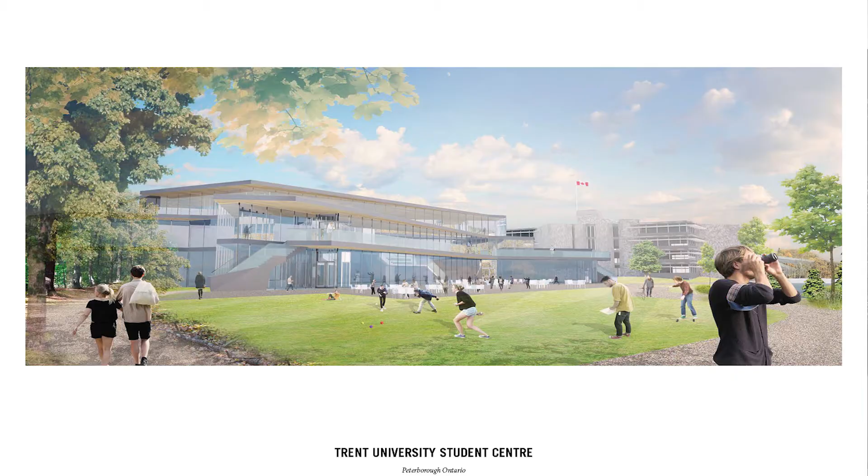This was a project I worked on for a year between my undergrad and my master's: the Trent University Student Centre. It was a really great project to work on because students are an incredibly diverse user group. They're really passionate about what they're doing, they all want to be there, they're very politically engaged, and they're super active in a wide range of things. So this was a great building because it was full of all these different kinds of people and programs. Working on it made me realize that I really wanted to be an architect and that I wanted to go back and do my master's.

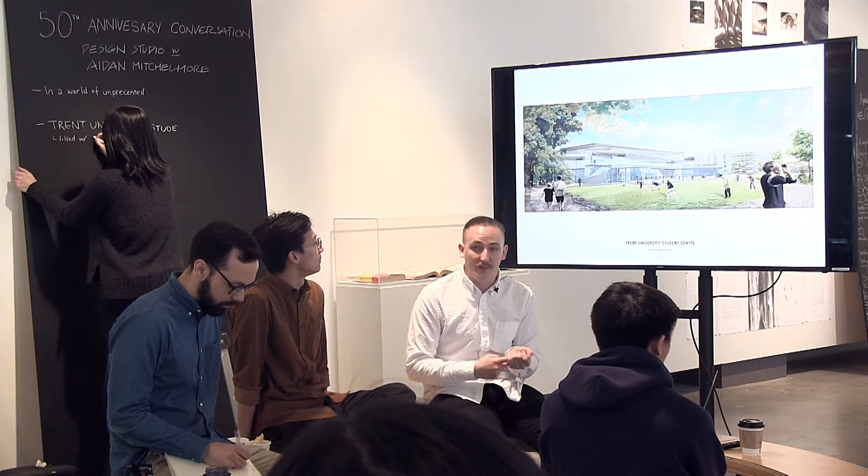Going into master's, I knew I wanted to work on some kind of physical building for my thesis, and that I wanted it to be a cultural building within an urban center. So knowing all of those things, I arrived and started to search for this idea of what's invisible or what can go unnoticed within the built realm, and how architecture could find a way to explore what we take for granted or what's unseen.

So I discovered, or arrived at, this site of Union Station, which is at the heart of downtown, an incredibly dense and ever-densifying urban center. That became the site, and then I went through a process of uncovering it.

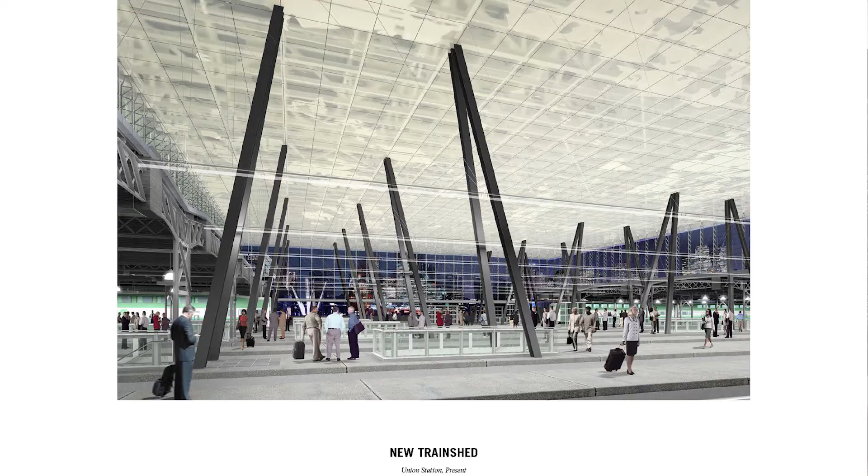But this is the kind of station that is proposed and will soon be completed: a new train shed above the station, and about 200,000 square feet of private leased space constructed below the entire station. Essentially they're building a giant high-end shopping mall below the station, and giving the lease over to one specific entity. That lease also allows for the private leasing of all the public spaces within the station. This is what I started to uncover after visiting the station, seeing it under construction, and wondering what the future is going to be like.

So it's a bit worrying, this kind of future that's going to happen.

So this is the departing point for my thesis: how can I imagine a proposal that transforms the station away from a capitalist, overrun, commercialized space towards a more democratic and public space.

So for me, how many of you are in master's thesis right now? Can I just get a show of hands? Okay, so the rest of you are in undergrad?

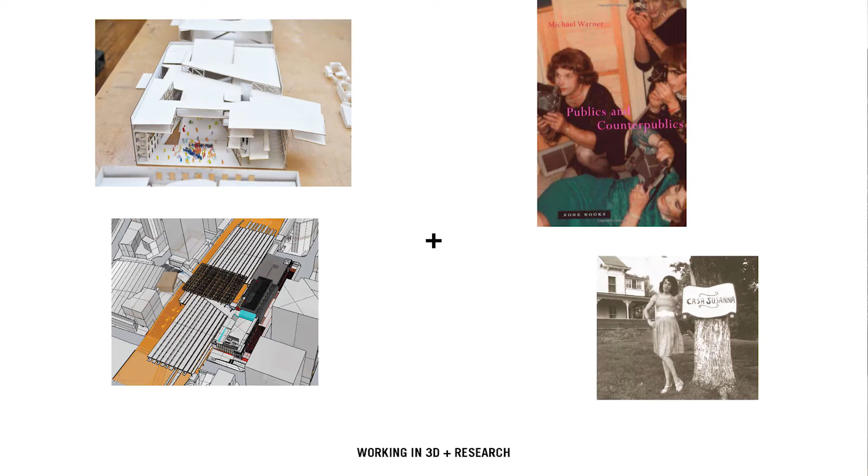As this process happened, I was also refining that design problem. What's interesting about thesis at Waterloo is that you can take your design problem and shape it while you're shaping the project, so that at the end they hopefully meet in roughly the same place.

So when I say working in 3D, these are some sketch models I did. As I worked through digitally, at certain points I would just hit print and laser cut a physical model.

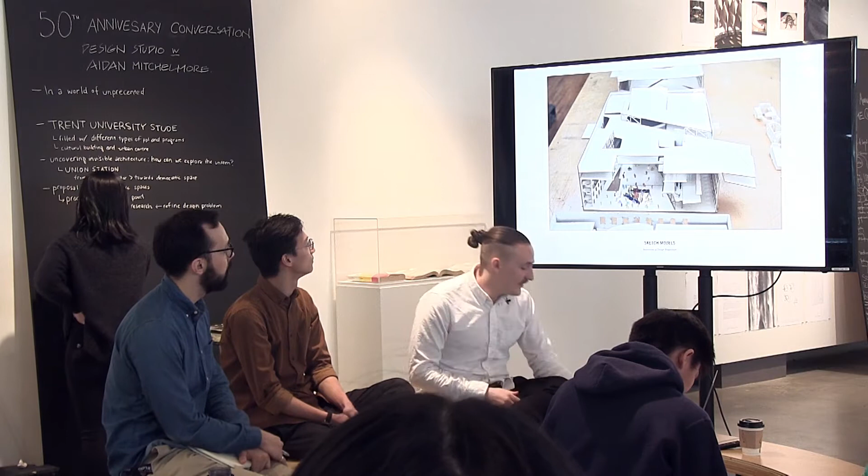Another key part of working in 3D is looking at your precedents. In undergrad, a prof would say look at this precedent, I'd Google it and think 'okay cool' and get back to work. But in thesis, you actually have time to really get to know your precedents, looking at plenty of drawings, models, and photographs to build a 3D model in your head of these precedents. That was a really valuable exercise I didn't get in undergrad—really just spending two days diving in.

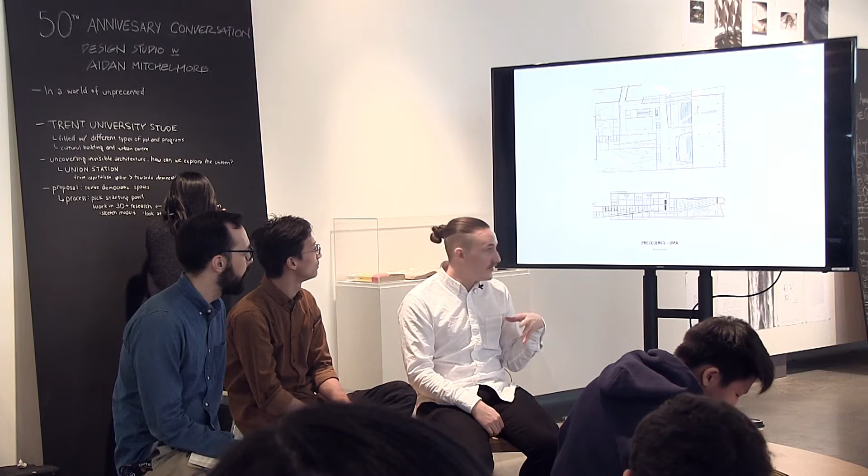For me, the precedents that were really pivotal in my design work were those of OMA, because their buildings are really big, often in urban settings, and have a lot of interesting questions in how they relate to inside and outside. There's also a lot of writing about them, so for me they were really useful.

Another approach was re-examining those models. I bought an endoscopic camera on Amazon, which is not for people use as I read on the label, but it's this camera on a string that you can stick into models and take photographs.

So I took some photographs of some of the sketch models as another way to reanalyze what I've done, and to reinterpret the work and see it from another perspective.

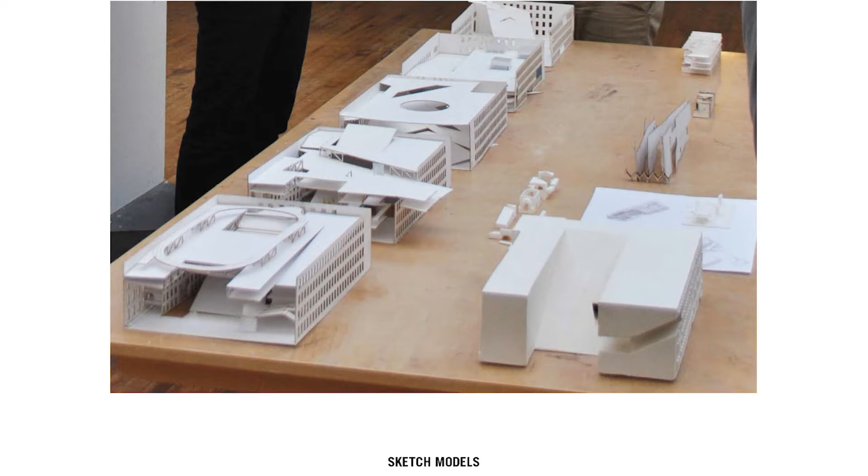So by the end, this is a photograph, a cropped photo at my thesis defense. If you work iteratively and keep making physical models every time you have an idea, what's valuable is you end up with this collection of artifacts.

That can clearly explain your thinking process throughout the design process. You can see on the far side of the image is where I started, which was this vague idea of having a roof plane come through the building. As it went through multiple iterations, it arrived at a more finalized and resolved view. Over here are some other study models, but together you can really get a sense of what the intentions were and what some ways you explored were. So it's great to save those things.

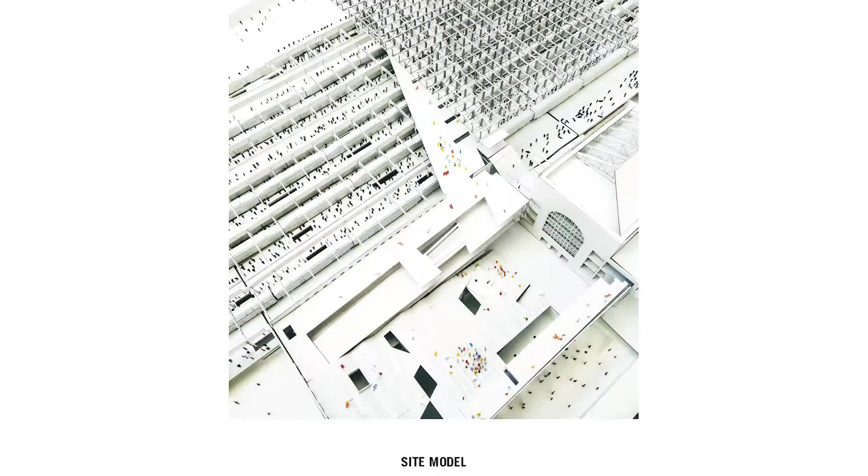And then this is a photograph of the finished model that I had at the defense. So those sketch models were used in tandem with this larger site model, taking the smaller ones and putting them on. This was kind of an ongoing design project in itself. It took like 1.5 years just to build the model that's over there.

So I would take a week off and draw trains and put trains together while I was thinking, or in off time, kind of like a labor of love, that thing. But that's where that ended up.

And then so whilst all of that 3D work and thinking through space was happening, I was also trying to research, trying to blend the two of them together.

And so this book, Publics and Counter-Publics, was really pivotal in trying to understand how to repoliticize this space, and how you could attack Union Station programmatically.

So the rough premise was that since it's become a commercialized space and it's only attracting a very narrow group of the population with its high-end retail amenity, it's only really going to attract shoppers who can afford to shop there. So part of the proposal became: how can this project attract a diversity of publics?

So, what are some other people that could be brought there to rejig and shift what the public of the station was, and turn it into a more diverse and thus democratic kind of space?

So Publics and Counter-Publics is a book by Michael Warner, who's a queer theorist, and he introduces this term of the counter-public, which is a name for a public that exists outside of the regular public.

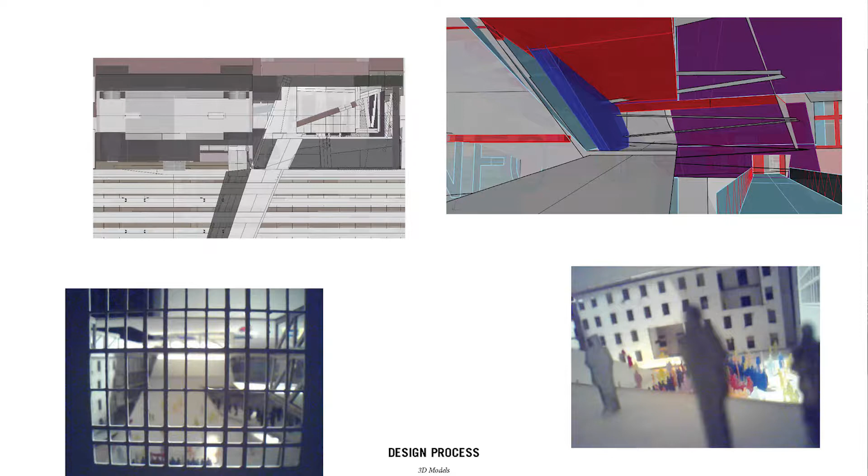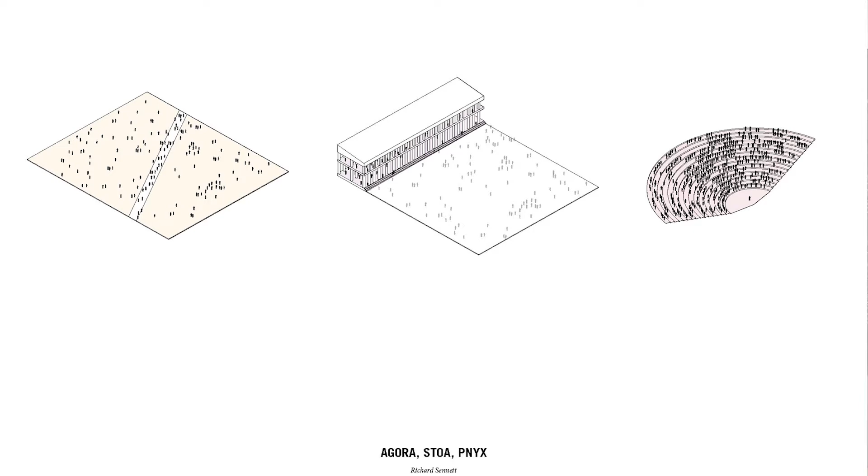So I read a lot about political spaces, and one of the key readings I looked at was Richard Sennett's The Spaces of Democracy. In this reading, which was a lecture, he talks about two main political typologies in ancient Athens. The first is the Agora, this kind of huge uniform public plain — it's the typology that's been adapted for civic squares. Nathan Phillips Square is a great example of this: a big flat plain where you can look out and participate in all these different democratic activities, and choose whether to engage or just spectate.

The other one is the Pnyx, which is an assembly hall created by subverting the ground plane at an angle so a group can focus their attention on one specific member. So while the Agora is this open, egalitarian space, the Pnyx allows for focused and productive discussion. They both have different advantages and disadvantages.

The one he mentions, but that I used as a primary typology, is the Stoa, which is a space along the side of the agora where you can sit back and look out over this big plain and choose to participate in it visually, but also retain your privacy and maintain a level of protection. Historically, these spaces had smaller meeting rooms off of them that you could hide away in. So these three typologies became the basis for the organization of the project.

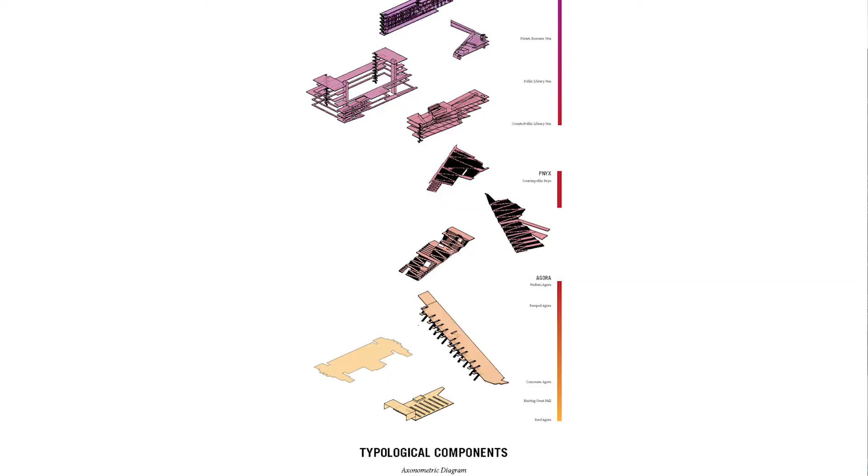I broke these programs up into 9 variations of these types, and they all overlap and overlay — some are more in between this spectrum of Stoa, Pnyx, and Agora. Together they formed this nugget of really intense overlaid social programs that nestles and is interconnected into the existing station.

Looking at the fundamental proposal of how to approach this, one big move — or one main criticism of the existing revitalization of Union Station — is that it took a lot of pedestrian traffic away from the Great Hall, which is the main space of the building.

And it deliberately diverted them downstairs into the basement so they would go by all the shopping malls and buy things. So a lot of architects in Toronto thought this was a huge insult to the station because it's really undermining this Great Hall's public ability to perform as a public space.

So the departure point for the form of the building was to integrate into the path network and propose a shortcut that extends over the station from the south and directly deposits you in the center of the Great Hall. So it's bringing a lot of pedestrian traffic back to the Great Hall as a way to republicize it, but also providing a shortcut to the TTC station.

So that's what you're seeing up at the north. There's about 20,000 people who cross through Union Station, not to use the GO trains that are there, but just to go through the station to reach the TTC. So this would be a bridge over for them primarily, and also a circulation spine that the rest of the project could hang off of.

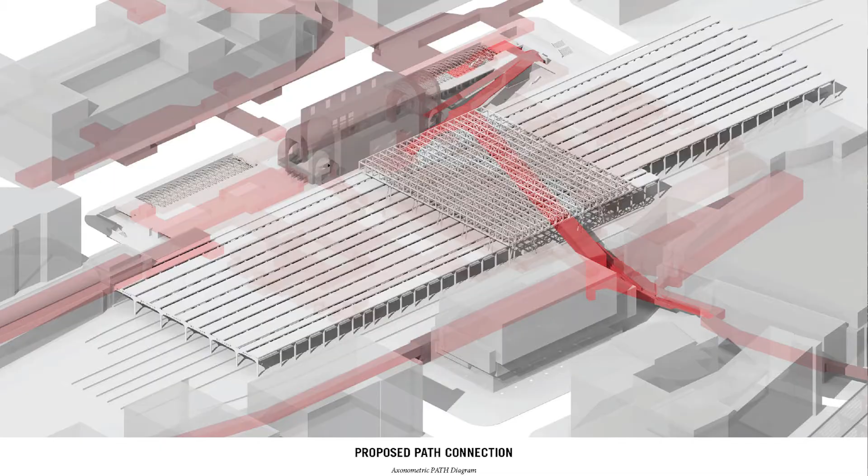So this is another diagram of what it would look like, closer to what you're seeing there. And then the rest of the project hangs off of this spine. I'll quickly go through these 9 types, starting with the agora spaces.

This is a large assembly hall that would be most of the east wing. It's left really open. It's this ramped agora, in between a pnyx and an agora because it's sloped, but you could imagine it as a place that has all kinds of activities taking place on it, and it's a really democratic, free public space that you could just hang out in.

It's connected to a roof, which is again another kind of civic square on the rooftop that you could imagine all kinds of uses for. It connects to a concourse agora that also spans across the train shed of the station. So these spaces take advantage of the low-rise reprieve caused by the railway corridor as a way to put a nice public park space on top of the building.

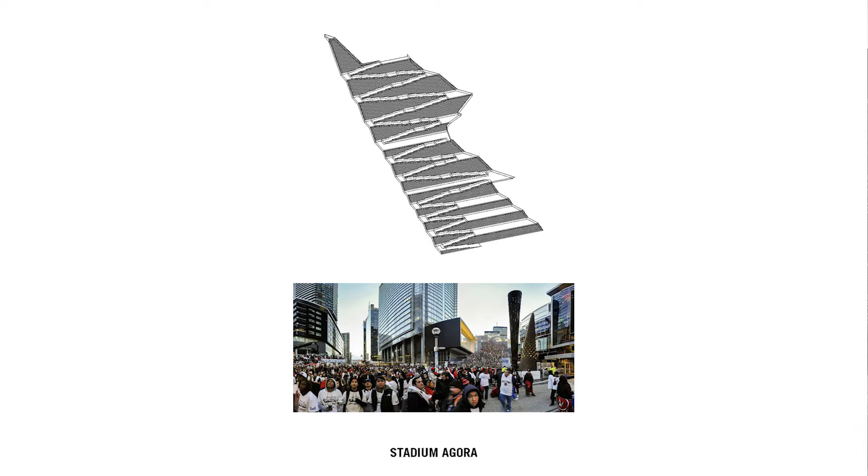And then on the south, it would reach this stadium agora, which is conceptually meant to be an extension of the stadium seating at the ACC adjacent to it. It would be able to become this giant urban spectacle during events at the Raptors thing, like the Jurassic Park. So it'd be this kind of urban performance space, but also like a Spanish Steps — just a place to hang out.

So there's this civic generosity in the agora spaces that suggests a more democratic participation. And then the next one would be the stoas, and they exist along the perimeters, between the exterior heritage facades and the interior agora spaces — they occupy the space in between, able to look into the larger public spaces.

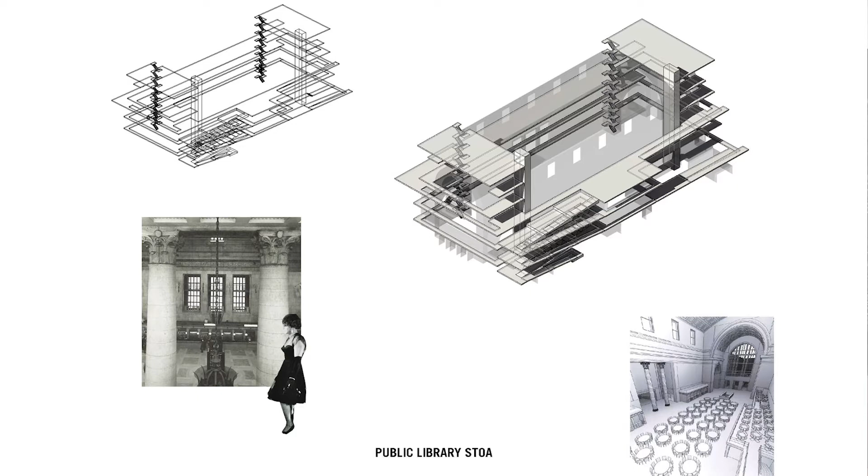This is like a public library that was seen as a way to circle around the Great Hall, as a way — so this could be the future of Union Station as a rental space where you could have a party in there if you can afford it. And so the public library that circulates it is meant to undermine that privately operated event.

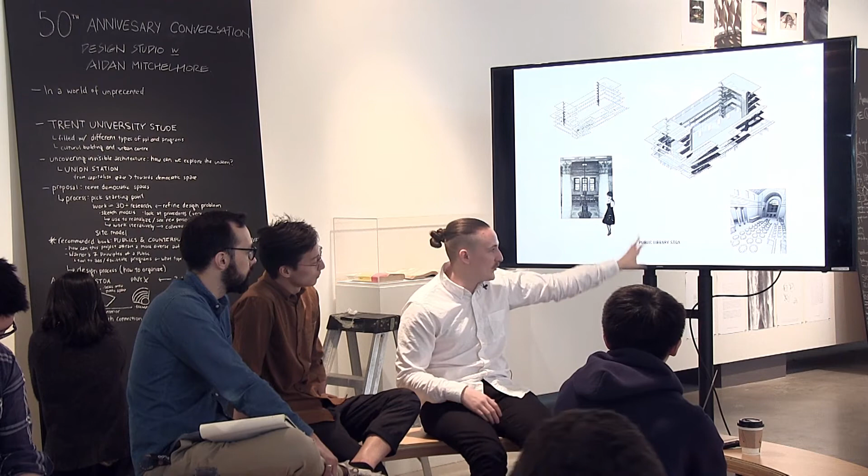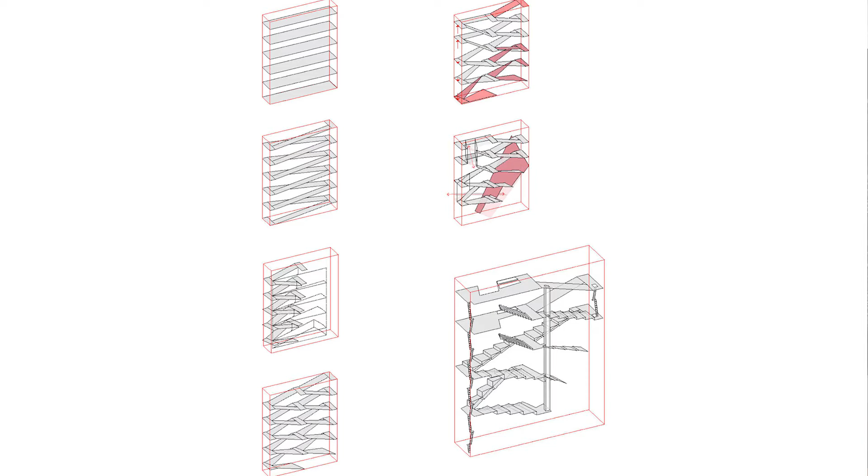And it connects to this counter-public library stoa, which is seen as a library but targeted for counter-public needs, relating to media, like circulation — maybe they make protest posters in there — leaving these programs open so that the publics, which are self-organized, can decide what happens within their spaces. And so this was, the form was derived through a series of manipulations that ends up being this combination of agora, stoa, and Pnyx in this exploded, stretched vertically form.

And then underneath that is this resource stoa, which is a more private space where you could have really intimate meetings. You could have purely anonymous exchanges there. It has its own entrance.

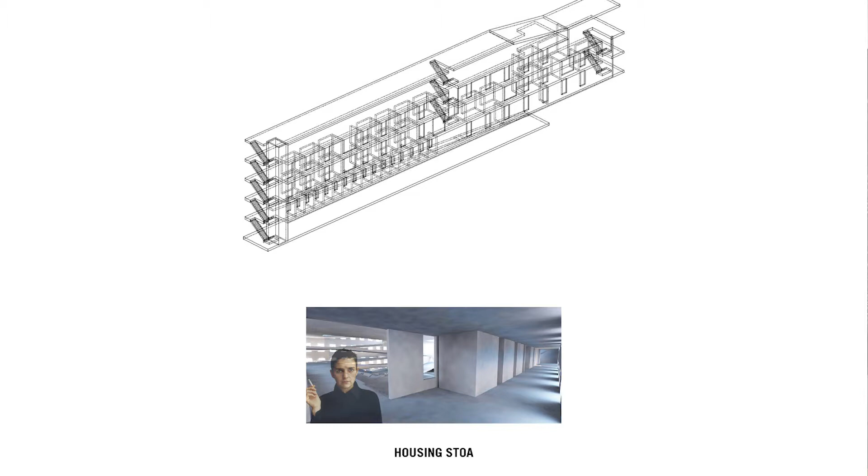Across from that is this housing stoa, which is kind of inserting a home into the station. So if you're homeless or in search of a home, you could hang out on the ground floor overnight, or if you're looking for something more permanent, you could move up the floors of the building towards more stable, more established, more intervention-level home, accommodating a diversity of counter-publics in the building.

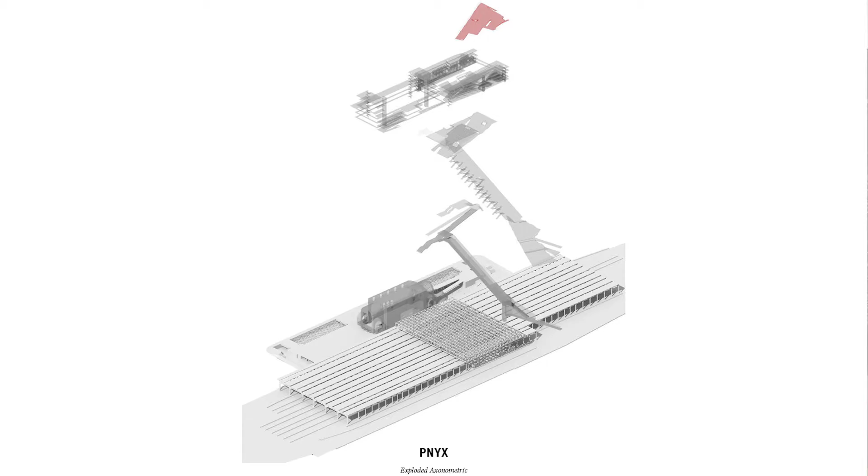The last one is the Pnyx, which slices through underneath the ramped agora, and it's this assembly space that again provides a diversity of participation. You can choose to be very publicly visible, or remain in the shadows, giving these counter-public groups a space to assemble while maintaining some privacy if desired. That was the intention.

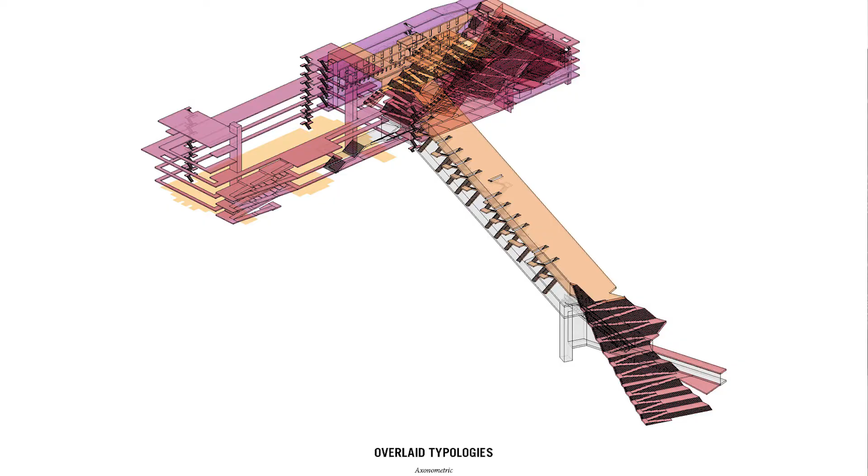So together you can imagine this overlapping, overlaid levels of publicity, counter-publicity, proximity and adjacency, and visual relationships that overall accommodate a diversity of needs.

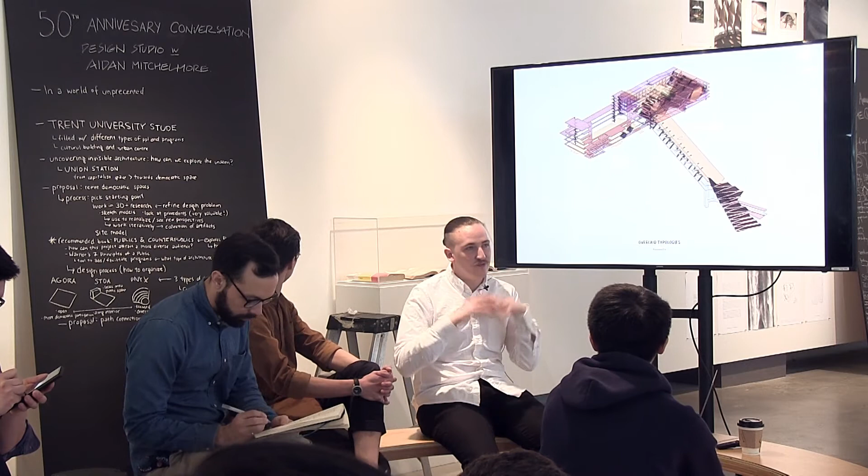All of this is taking place interwoven into the excitement and busyness of Union Station, as 250,000 people use the station a day. So you can imagine it being this really hyperactive, interconnected social fabric.

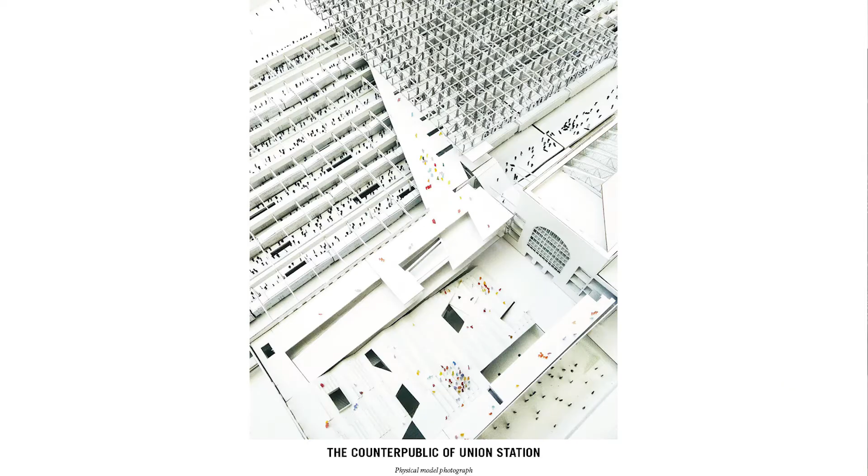Okay, so I'm getting close to the end. This is just a few photographs of the model, taken at my defense, and it was a great tool to explain this really complicated spatial project at a defense where it's a discussion. That's kind of where my thesis ended.

And then I went back to work for Teeple Architects in October, 5 days after defending, which I don't recommend that you do. Take a break.

I went back to Trent, and the student center that I worked on was finished, which was a really cool experience to see. But what was the coolest thing is this building has a gender-neutral bathroom, and actually all of the bathrooms in this building are gender-neutral.

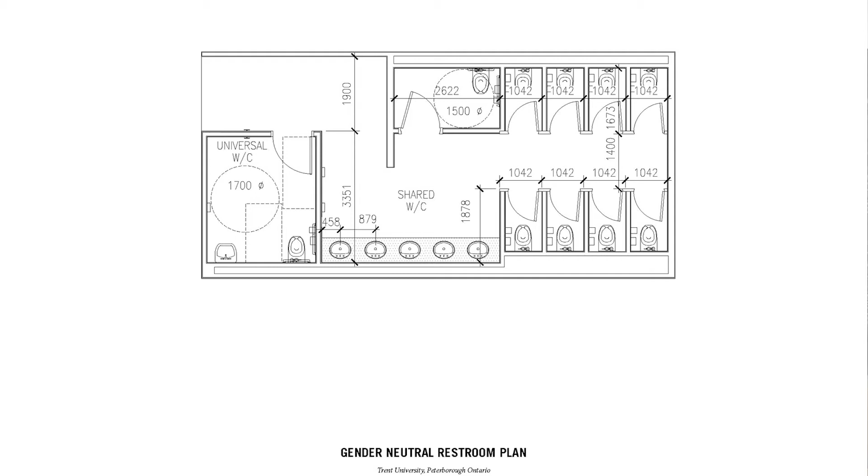That's something the students really fought for, and we as the architects said, look, this is the students, this is their building, let's prove to the university that it can work. So that was kind of our role, to really advocate for what the students want, because they're a very progressive, very queer-friendly institution, and then they ended up building them.

So all of the bathrooms in this building are gender neutral, which is kind of amazing, and it's an interesting way to look at it - in my career I might not be able to imagine the kind of projects we can in thesis, but something as insignificant or invisible as a bathroom can have a huge implication for a counter-public. So understanding the client and understanding the small and subtle things architecture can do can actually be really important.

So I'll leave it there, and thanks.

So we are going to open up to a little conversation right now. Why don't I start with a little question regarding your presentation, Greg. Can you go back to that image where you have Adrian looking at your model?

Yeah, brilliant. So when you mentioned how you engage in the practice of doing a lot of different test models that have to be very finished in order to actually dive into that space and take photos and experience the atmosphere in the spaces - I know a lot of universities also engage in that practice where they push students to constantly produce scale models for them to have that tangible tool they can inspect, which is something I see is pretty lacking in our school, where a lot of the time we just push for the final 2-day model.

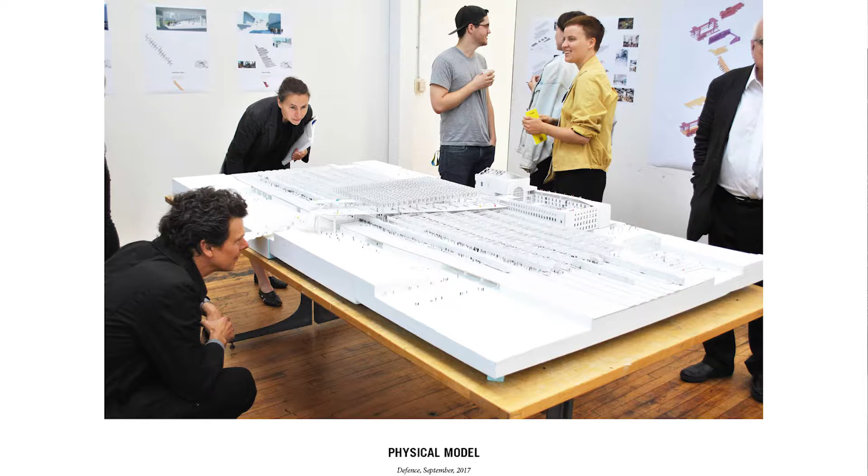It's like an infinite number of perspectives just looking at it. There's a certain kind of understanding you get with the scale, the spatial qualities and their relationships just by having something in your hands. And if you have those, it's really easy to combine photographs of a model, or collage directly with the models themselves—cutting out people or other images and putting them in the physical model, so the model becomes a physical collage.

There's all sorts of opportunities to blend the two together. But I'd say getting over the hurdle of laser cutting and just making something is probably the most important thing for me.

I also see it as some sort of forced confrontation to whether the space actually works, right? When you have to combine everything together and see them at once, compared to an individual model where you're constantly only focusing on one space, not directly connected to the entire scope. And not covered behind that facade of the beautiful image you're making—you actually confront whether that space really functions as you desire.

Another interesting thing about the digital world versus the physical world happened with AutoCAD—you could just keep zooming in. For example, if you have a plan, like when I was in undergrad, I was really obsessed with making sure the details would work. I'd zoom into a window mullion and make sure the glass is meeting it, get even closer, and then all of a sudden you've wasted an hour, because when you print that plan at 1 to 500, you can't even see the mullions. So it's great, but there's something about—

with a physical model, depending on what scale it is, you're kind of forced to go through the process of determining what's worth representing. One of the models I made was 10 times smaller than this, and it was this big. That was actually a much harder model to make because I had to be really selective—do you put windows in it? Do you even put floor plates? It ended up being this kind of massing model of those nine typologies, just these shapes that fit together.